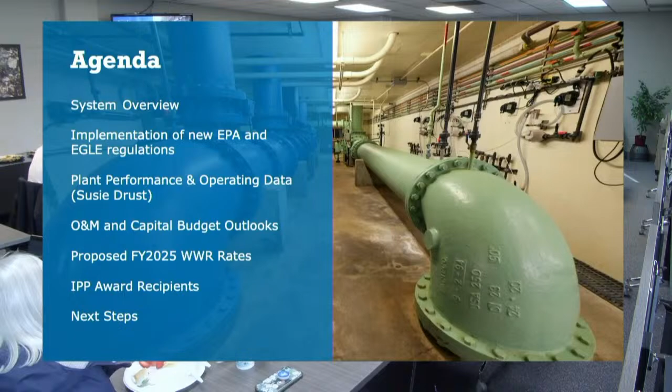So just going into the utility overview, this green polygon on the screen represents the areas that we serve. Many of you here today are your own wholesale entities. You provide service to your own customer base through retail agreements or retail agreements that you have with others. So your area may be a green blob on this map. So all the green blobs on this map all come to this site where we're all sitting here today for treatment.

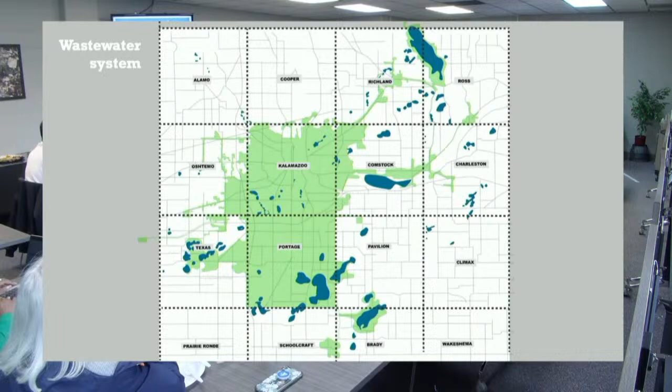This plant is unique. It is the only plant in the state of Michigan that has powdered activated carbon treatment. This plant was specifically designed and built to handle the type of waste streams that it receives, so there's a lot of unique characteristics there. This plant also has an EPA exemption for pharmaceutical waste that provides us the ability to treat that.

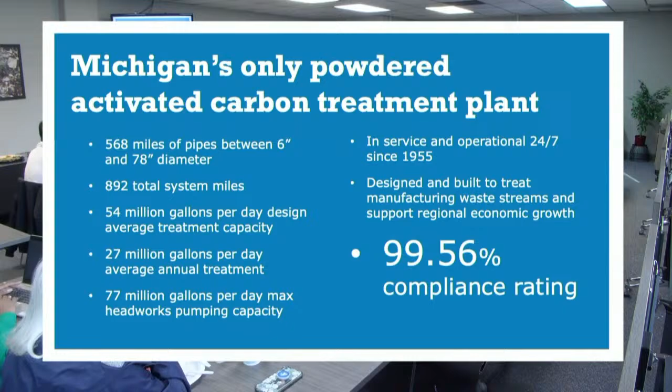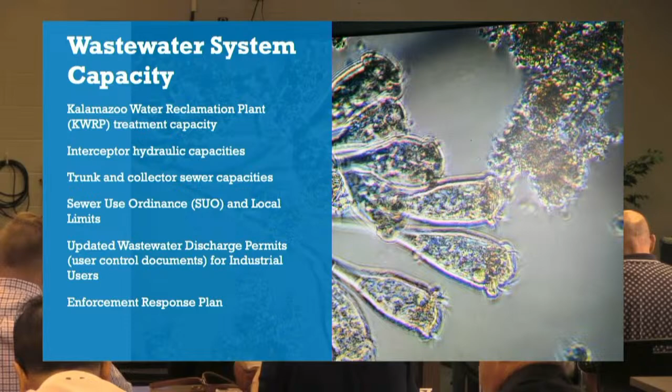In terms of system capacity, we're going to talk quite a lot about this. This has been something that's a bit of a changing landscape for us. We're actually going through an evolution now, through changes with our permit and changes with EGLE, moving away from our historic hydraulic nameplate capacity, and getting into capacity of individual pollutant parameters. We're getting into treatment capacities of pollutants and specific capacities for things in our sewer use ordinance. So we're going to kind of walk through that so there's some broad understanding by everybody.

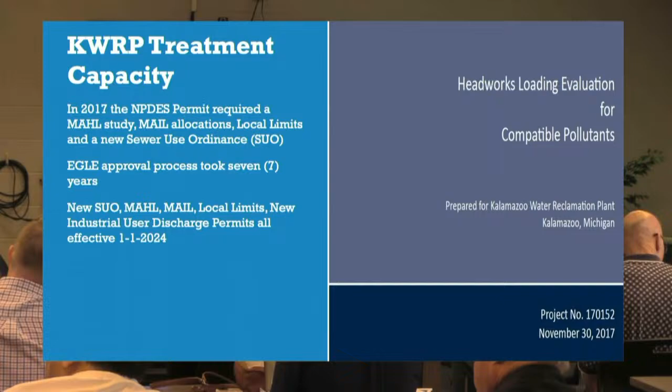Going back in time, back to 2017, we were issued a new permit, and that new permit required several things. It required, first and foremost, that the City of Kalamazoo conduct a MAHL study and incorporate a MAIL. So that was a Maximum Allowable Headworks Loading study that had to be incorporated, and then that MAHL informs the MAIL, which is the Maximum Allowable Industrial Loading.

Getting into some background on that, the way the plant's configured today has had a few modifications to it, but broadly speaking, we're the same plant that went through a basis of design back in 1979, went through actual engineering design in 1978, and during those original designs, we had loading parameters that we established and based our treatment capabilities on. With the MAHL study, a lot of these things changed, and so we ended up getting down to a MAIL, an enforceable MAIL, of only 168,000 pounds for BOD.

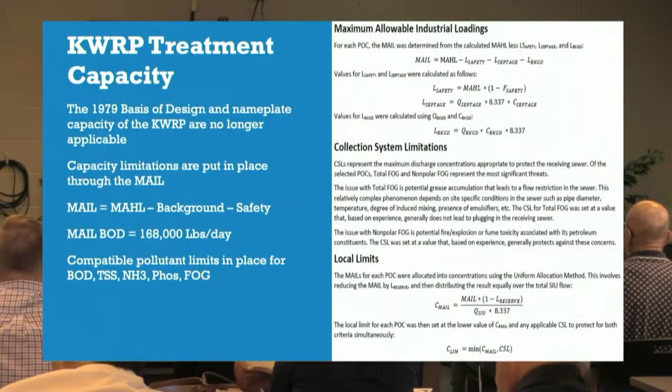Now, all compatible pollutants were updated. Those industries that are here today, you see those in your new permits, and we're going to be talking about some of that. But broadly, there's been a major change from nameplate capacity to where we operate today, looking at capacities in each pollutant parameter. So, one of the things to highlight in terms of where we were, 53.5 million gallons per day, that's our nameplate capacity. We're currently sitting at about 27 million gallons per day of actual flow that comes in our door.

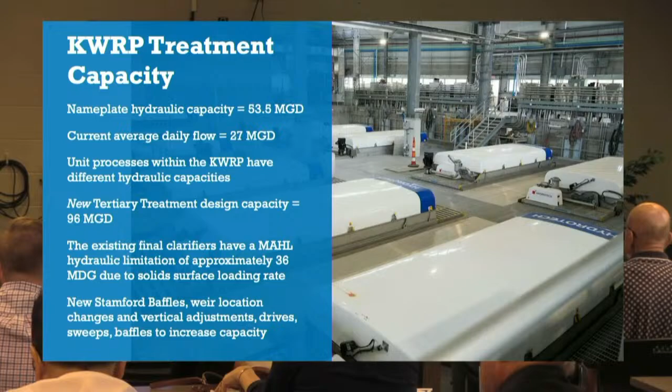We just completed, and you can see the building behind us, a new tertiary treatment system. That's a picture of it there behind us. That system was built to withstand a hydraulic flow rate of 96 million gallons per day. So you can see that we're maintaining and enhancing our hydraulic capacities, and we're having to do that because our organic loadings are much higher. We've got some additional projects we'll talk about in the capital plan that will help to bring up those loadings so that we can restore and reestablish some higher MAHLs into the future.

We also want to touch on wholesale industries and also our townships. So we have IJAs, which are interjurisdictional agreements. Those agreements are essentially in the process of getting rewritten. We've got a requirement from EPA to rewrite those. We also have been working with a group of our township folks represented by the Regional Commission that are helping us to negotiate new long-term agreements. Those agreements are well through the process, and we wanted to highlight that flow and loading is not a limit of those agreements. So those agreements do not limit loading, they do not limit flow. Flow and loading are limited by the physical capacity of pipe in the system and where your discharge point is. However, industries are regulated by that.

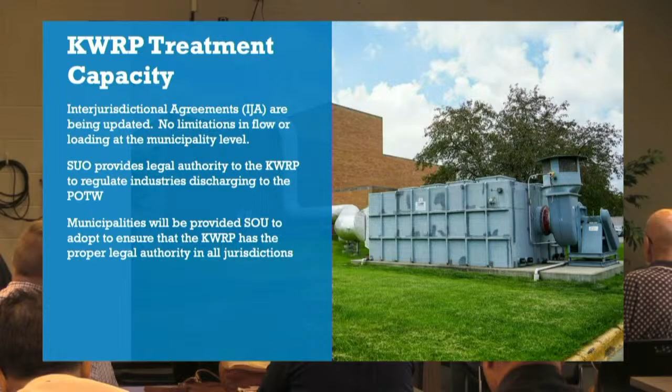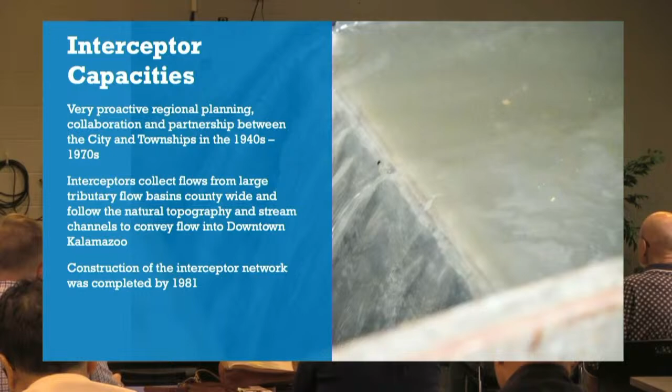Kind of talking through that, we have a vast interceptor network that was built through a lot of great partnerships by many of the communities sitting here today, many of the townships, also supported by Kalamazoo Board of Public Works. That interceptor network was built from the 1940s and completed in 1981. That interceptor network remains extremely strong, viable for future flows. In fact, that interceptor network flow capacity is greater than our pump capacity. So we've got an ability to pump 77 million gallons per day here at this facility, and one of those interceptors can flow more than that. I know, like the river interceptor, at half full or 1/3 full can flow something like 54 MGD.

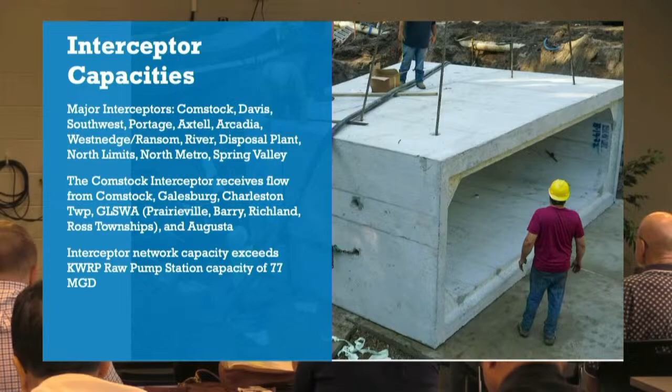So we saved you having to look at it, but we've got a spreadsheet that shows all the interceptor capacities throughout the entire system. But we're nowhere close to exceeding that. So that's good news in terms of capacity and future capacity of both our industrial users and our wholesale providers. Some of the tools that we've got in place to help us monitor that interceptor network is a real-time smart sewer system. So we've got, and we'll be sharing logins and how to access the system.

Your engineers are really going to be excited by this program. We spent a lot of time, about 3 years, developing this, and we've got sensors in manholes all throughout the system. Those sensors monitor flow. So you've got a pipe, the diameter of the pipe, and the grade of the pipe, which means the angle that the pipe is sitting at. And we measure the flow.

We can tell you how much flow is in that pipe, the height of flow, by using Manning's equation. So not 100% accurate, but it's as accurate as most engineers get in terms of monitoring flow in gravity sewers. So it's a great way to check on the system and monitor the system in real time. And so that system is now running in the background, and it will alert our engineers and staff if we have an area where we see a blockage is occurring.

We responded to a blockage of the southwest interceptor along a railroad and low-lying environmental concern area, which is a swamp, something that we don't want to have sewer overflows go into. We were able to go out there and remove a blockage before it became an overflow.

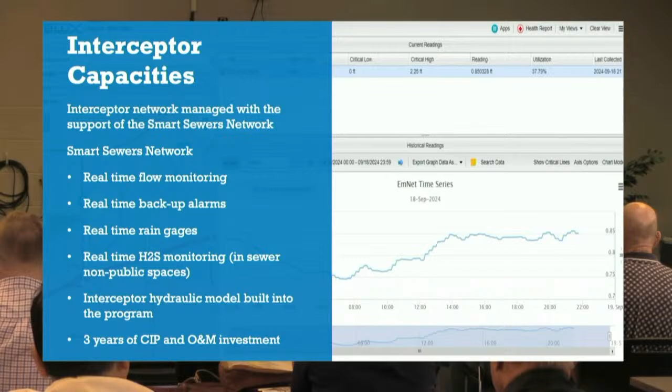That can really help in real time when we're looking at flows that are coming in, high flows at lift stations. It can also help us in future planning as our engineers are looking at spatial distributions of rainfall within our area. If you're into rainfall, if you're into weather, you'll know that Kalamazoo as a county doesn't always receive the same amount of rain over the same area. That rain can be really variable throughout the storm events.

So overall, this system has been extremely beneficial for us. We continue to learn new features of it and employ new features of it, and it's something we're going to be sharing with our engineering partners in the townships as well as we continue to roll that out.

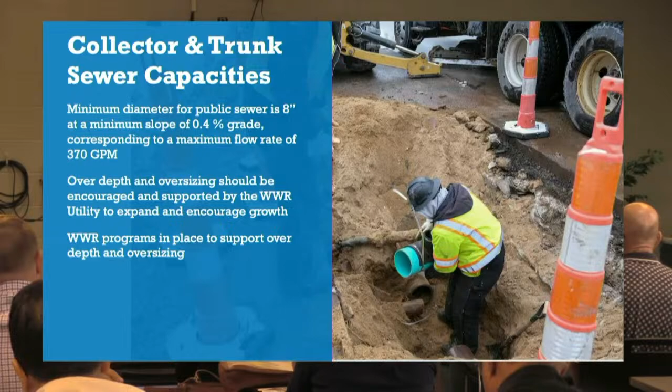Another program that we have, just to kind of touch on it: your regular 8-inch sewer that's down some road somewhere. That sewer's got a finite capacity just based on its size, and we've got a program over on the water side of upsizing. We also have this program for sewer that we're going to be pushing with our partners in the townships. If you're planning an area that is going to experience changes in zoning in the future, maybe that area is going to become a commercial area, we should talk about considering going deeper with your sewer and maybe going larger diameter with your sewer so that you can serve more customers in the future.

So bringing it back to that term regulated capacity, we had a whole host of regulatory enforcement actions that we took in cooperation with EPA and EGLE. That all went into effect on January 1st of 2024. So we've got a new sewer use ordinance, and if you look at our new ordinance compared to our previous one, our previous ordinance was about 30 pages. Our new ordinance is about 180 pages, I think. So it's quite a difference.

That then opened the door to establish new local limits. We've got new dewater and discharge sampling requirements as well. PFAS has been a big issue for everybody. We now regulate and control how much PFAS you can put into the sewer system. We have a PFAS limit here for our headworks loading. We're only allowed to load the headworks with so much PFAS, which means that we can only put so much PFAS in the pipeline.

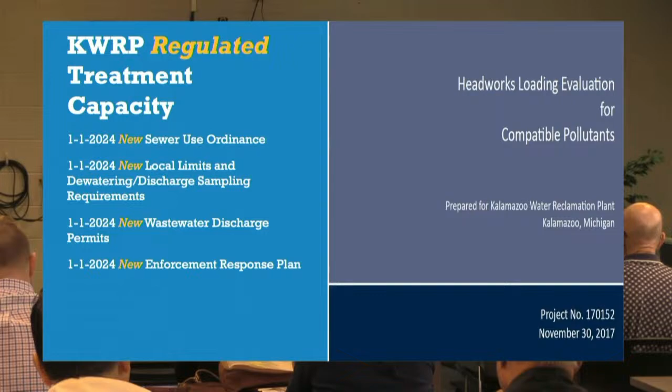We just built a new GPI pipeline between us and GPI. That was a $3 million pipeline. We got the analytical results back for dewatering and discovered that there's PFAS above our headworks loading limit.

We had to bring in a temporary filtration system with GAC treatment to dewater to support that project. That added another $1.4 million to the project. So a $3 million pipeline became a $4.4 million pipeline just because of PFAS regulations.

And I know those kinds of things are going to happen to industries as you guys look to expand, and that's going to happen continually in construction in areas that are building in brownfield areas or building in contaminated areas.

New wastewater discharge permits. So everybody here on the industry side of the house is operating under either a brand new permit or a permit that's going to get superseded by a brand new permit, which will have new requirements. There are whole new requirements for slug discharge control plans, for spill response plans. Some of these things are very different.

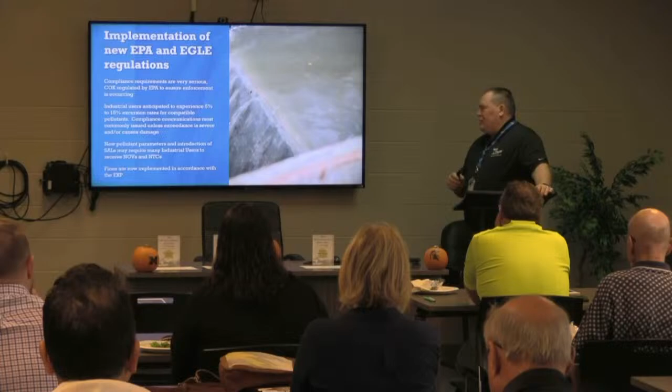Some of you industries have been with us as long as you've been in industry and have been doing it the way we used to do it for 40 or more years, and that's all changing now. So this has been a very steep learning curve for many of us, and we're continuing to get through it together. We also have our new enforcement response plan, which provides guidance on equalized enforcement across all the different industries based on what type of situation it is.

So one of the things we wanted to highlight in terms of compatible pollutants is that most every industry was designed based on our limitation of MAIL. If you remember, our MAIL limitation, maximum allowable industrial loading for headworks, for BOD was 168,000 pounds. So that's not a lot. So that's getting spread pretty thin across all the industries. And that same story goes for solids, ammonia, and what's going to happen in 2025 is phosphorus. And that's already in your permits, and so that's getting regulated right now.

So those limits are spread thin, we know that, and we anticipate that most industries will have somewhere between a 5 and a 15% excursion rate on many of those things. So most excursions, if it's a compatible pollutant and it's non-severe, so no impact, no harm, those are usually handled with what we call compliance communication. If there is an exceedance that's severe or that causes damage or harm, then that compliance communication will be a notice of violation.

We've got all those new pollutant parameters that we talked about. Some of those are requiring SALs. You might have an industry like a metal finisher that now has a limitation for phosphorus. They didn't before. They're now having to have an SAL, which is a special allocation for loading. That now requires us to know your process flow, so we can put concentration and flow together in real time and create a loading number for that. And so that has to be flow proportional sampling.

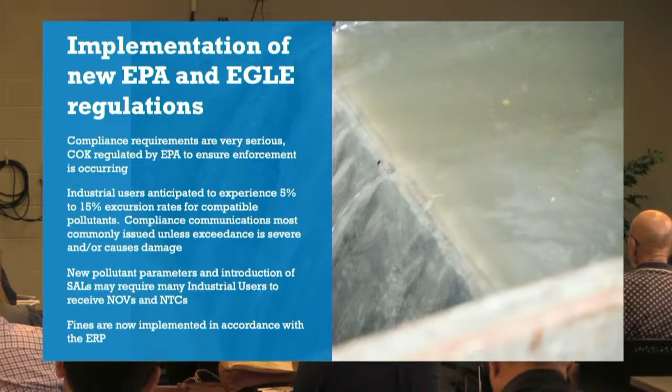Fines are also now part of our ERP. So our minimum fine is $10,000. We usually always try to fine in abeyance. If you get a fine in abeyance, that means that we're going to hold that fine and suspend it while you conduct action in your NTC. So you've got a notice to correct that said we need you to install a meter, or submit some reports, or do some sort of action. And then if you complete that action, that fine is not administered. We also have industries that were unable to meet that requirement, and so that fine did get administered.

Jumping over to some O&M and capital budget outlooks, we want to talk about what are some things that we've been working on at a higher level with some of our other partners. I'm talking a little bit here about our rate negotiations with our regional commission. So there are some fundamentals that we're working towards, and some of those are an equalized rate concept, embracing regional cooperation, looking at this instead of 22 independent systems. We really try to look at it as one broad system with one common goal.

Our common goals are to provide clean, safe treatment, so that we're protecting the environment. Ultimately, that treatment is what we're after. We're also after following EPA regulations on the industries and everything else. And then just that simplified process for providing that service to the public. And if we look at this as a system and we embrace the concept of broad economic growth as a region, we can really look at having a goal of long-term economic stability and growth across the entire Kalamazoo County.

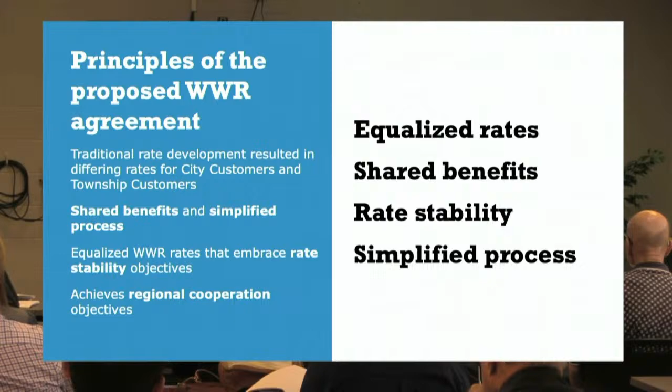So there's a lot of words on the screen here. I'm not going to read them to you. This information is taken right from the rate report.

It really kind of talks about these three main concepts in rates that have been controlling things. One is where we allocate costs for collection systems, and we're providing some updates on that. The other key concept is an equal rate concept of providing the same level of treatment for everybody, and embracing that concept across all user classifications.

So we talked about we have retail users, we've got in-city, out-city folks that participate in retail. We have this group, largely represented by wholesale service providers and retail service providers to others, wholesale to us, retail to others, and industrial users. So these same concepts are being applied across everybody.

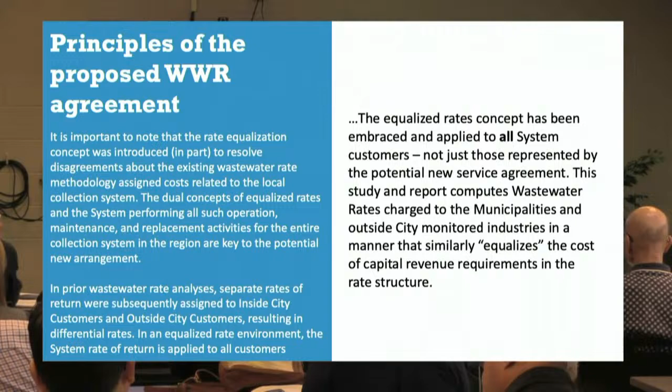And then the other concept within that is the concept of rate of return. If you take the rate of return requirement and spread that out across the entire system, it provides broad system benefits as opposed to a rate of return requirement only on a certain customer class, so that it provides better equity across that system. So those are the rate fundamental changes we're working on that will help the overall system create this concept of equalized rates and a regional approach to the service we provide.

Drilling into some specific areas of level of service, we see chemicals, including odor control, really starting to increase. We're spending upwards of between $5 and $6 million a year on chemicals now. Going back to 2018, that number was closer to about $1.5 million a year. Odor control is a big portion of that.

We've got new carbon scrubber units that are part of all the processes here in wastewater. That was an upgrade we made a few years ago, and we continue to support that with annual investments, the carbon changeouts, changing that carbon out at $600,000 annually to refresh that carbon. So that's one component of that.

Sludge disposal, we're going to talk some more about that as we go through the slides. That has been something that continues to increase year over year. Again, going back to 2018, we were looking at $4.5 million a year on that. That contract stayed with us through 2020, and we've been jumping ever since.

Some other work, really kind of focusing on those sewer collection systems. We take all of our systems and add them all together. We've got about 900 miles of sewer pipe in the ground out there. So that smart sewer system helps us to keep an eye on that.

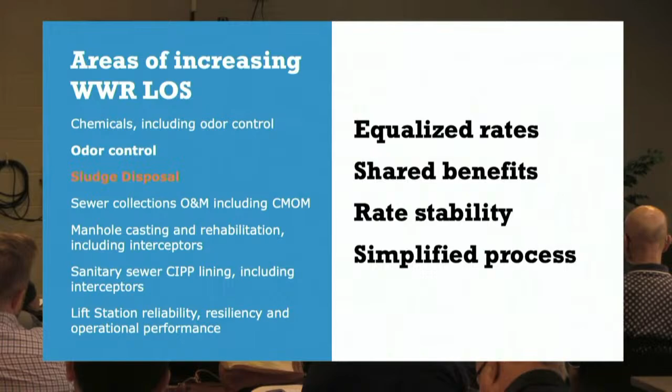We know that folks in your own retail areas are providing an eye on your stuff. And then, with our agreements with the townships, we're going to be doing some sanitary sewer lining and a lot of rehab work on that in years to come.

We've got work orders every day. The TOSs in the room can talk about how many work orders we do and how many are assigned to the different units. And there's a lot of data and information out there that can be overwhelming at times.

One of the other things we realize is that we all drive vehicles to go to work assignments, so nobody walks out to Augusta to check on the lift station. We take a vehicle, and every one of our vehicles are coded by department and GPS to the driver. So we can go to our GPS system and look at where our vehicles are going on a yearly basis.

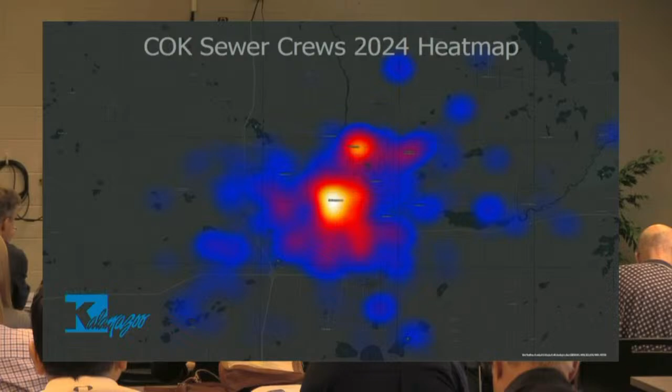So this image is a heat map. This shows you all of our 4-dash vehicles, which are owned by and assigned to the sewer department. This is everything from backhoes to pickup trucks, it's got a 4-dash number on it. And so you can see it's got some heat signatures of where that work's happening.

You see that we've got strong representation in kind of the core city, downtown. We're up in the north side, this is section 10, this is section 15. Down here, section 26. These are kind of known areas for older sewers, clay sewers, and roots. These are heavy tree producing areas.

We're up here in Parchment quite a bit, and then you kind of see dots where we're out touching everybody. You can see we're lighting up areas. Most of those areas where we're lighting up are lift stations or areas like interceptors, areas where we're out doing direct work.

So we actually got one of these infographics for our streets department, our sewer department, and our water department, so we're able to look at, on an annualized basis, where that work is occurring, just a high-level snapshot of what's going on. We do have a home base here at the Harrison facility, and one at the Stockbridge facility. We deleted all those endpoint trips from this overlay so that won't skew the data. These are actual trips, except for Harrison, except for Stockbridge.

Getting back to sludge, we're up to $13.2 million a year last year. That number is even going up. That's an operational number, meaning every year we've got to have $13 million come in just to deal with sludge disposal.

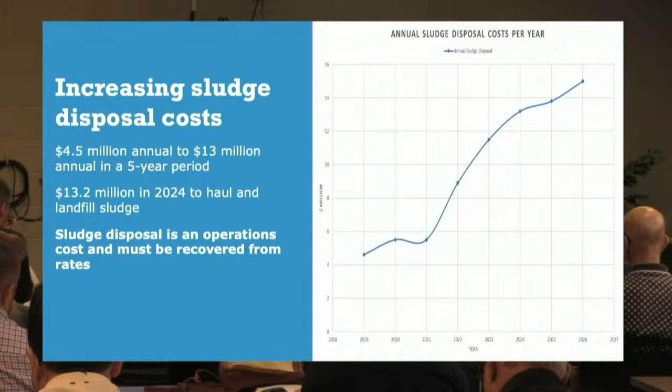We've been working on a process to really get after a new plan for sludge disposal. We've got our sustainable biosolids committee, and we've got a good governance group working on that. That group is going to meet again on November 13th. Essentially we had 30 technologies that submitted to our RFP, so we worked last year to narrow that down.

We got that down to 3 different technologies. We've been doing homework on those technologies to provide better understanding of cost, better understanding of capability, and better understanding of emissions requirements - what we're going to have to add to that equipment to ensure we're at zero discharge for any pollutant parameters into the atmosphere. We're going to meet again and come out of this meeting with some updates.

But where we're really going with this - right now we manage a wet product. We have liquid sludge. That liquid sludge goes through a centrifuge process - Susie's going to talk a little more about that - and then we dry that out. On our best day we're still only drying to 24% solids, meaning there's 76 to 77% water that we're hauling.

We're storing all that wet material on our site. We're consolidating all that wet material on our site, and we're transporting all that wet material through our neighborhood. So we know we've got to transition to managing, transporting, and consolidating a dry material - a dry material that's free from odor, free from any sort of vaporization or anything it can give off. And then ultimately, when we talk about landfill and transportation of dry material compared to wet, it's a huge reduction - we're talking over 95% reduction in weight.

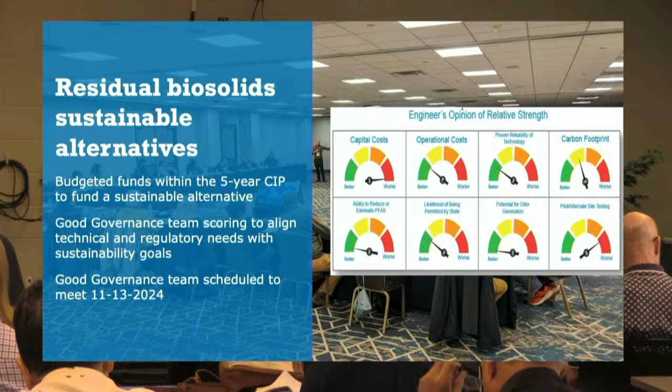Some other capital improvement focus that we have - we're really going to be looking at lift stations. We've got a whole new panel design, and we're taking those panels and putting them out at many different lift stations. I know Charleston's got some new panels. We've got 65 lift stations in the system, so they're all going to be new panels.

We're working towards getting generators at every single lift station. We went through the ice storm in 2023, and we had a real strong realization that we only have 3 licensed electricians on staff.

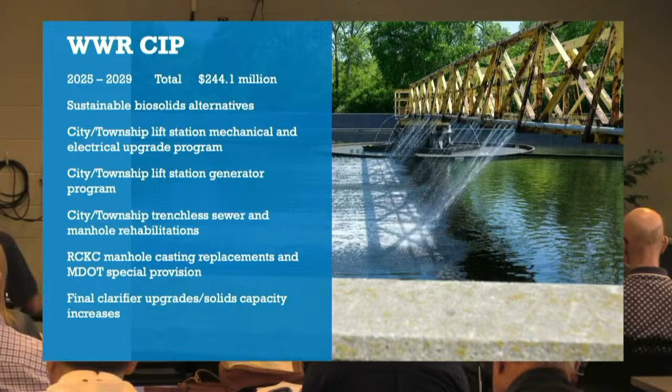And so for us to send a licensed electrician back out to the stations - if I've got a lift station down in Texas and another down in Augusta, there's a lot of driving that has to occur to get that electrician between those stations. So if we can get stations to operate reliably by themselves without a lot of input from our electricians, that's going to provide overall reliability to our system, and our electricians can stay here in the plant and focus on the big picture aspect of keeping SCADA up and running and keeping the treatment plant up and running.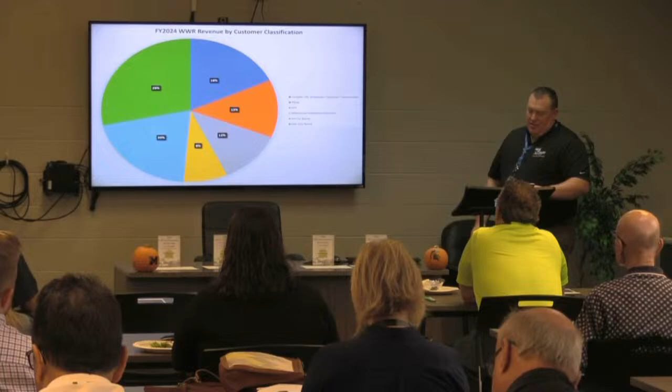So getting into rates here, we wanted to share with you this pie chart. It's broken up into all the different pieces. Broadly speaking, everybody that's in the room today represents about 51% of our revenue requirement.

GPI and Pfizer together represent 25% of our revenue requirement. We add in the wholesale communities like Gull Lake Sewer and Water, Vicksburg, Portage, those folks, and that brings in another 18% of that represented class. Then we've got the remaining industries that bring up about 8%. All told, it's about 51% of the revenue, leaving 49% to all the retail organizations, which would be City of Kalamazoo retail, and then all the townships that represent our retail communities.

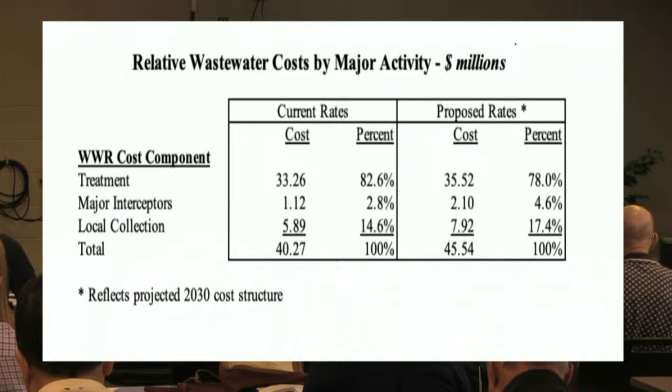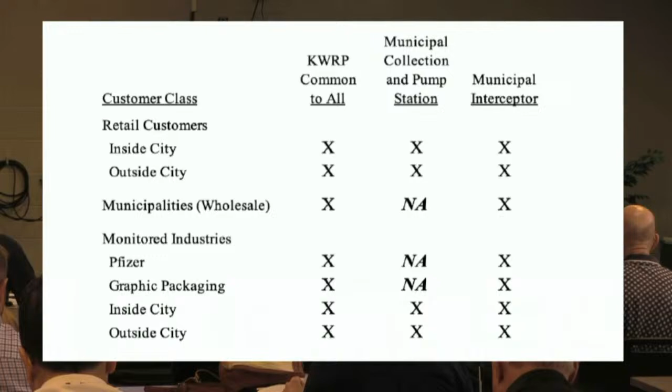We calculate this based on the removal performance of each one, talking from the operations perspective. Within our budget, the operations portion is assigned to treatment. We know the main goals of treatment, and we can go through each unit process and see how it performs based on actual empirical removal data. Those removals then tie back to actual costs, so we've got that shown.

We've had major changes in cost allocations over the last, I'll say, 5 years—let me go 6 years. If we go back to when solids disposal was $4 million a year in total, some years $3 million, when we ran filter presses, we really didn't have a lot of cost with solids in the grand scheme of things. Today we're on centrifuges, and sludge disposal costs are pushing $14 million a year—our costs are much higher than that. So those costs are starting to shift from being hydraulically centered toward being more focused on individual parameters.

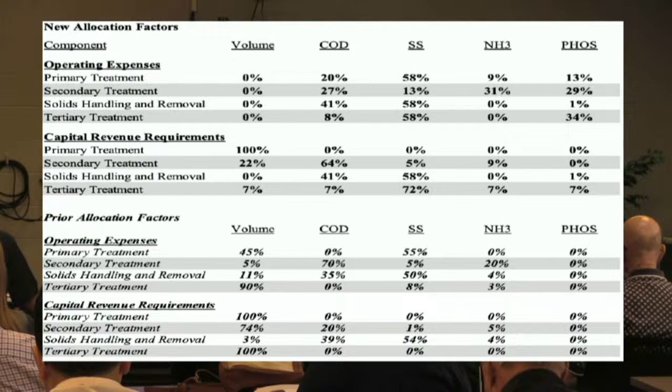Early on we talked about rate methodology changes and how those changes were really goal-driven for an equalized rate concept across all customer classifications. We talked about major changes in level of service and how that's driving costs in chemicals and sludge disposal. We talked about future reduction in operating revenue because we're going to build that sustainable biosolid solution so that we can transition from managing a wet product to managing a dry product.

And when we do that, we're going to realize some dramatic reductions in operational costs. We're going to have capital costs, but those capital costs are spread out over a bonded period, whereas operational costs are unique today right now. So those are changes. We also have overall changes in operational and capital cost allocation factors - just talked about that, that's this sheet right here. And then changes in customer classification, proportional use and distribution - that's what we talked about 2 slides previous, where you can kind of find yourself, municipal provider, what products are offered. Everybody gets treatment, everybody gets collections, or sorry, everybody gets the interceptors.

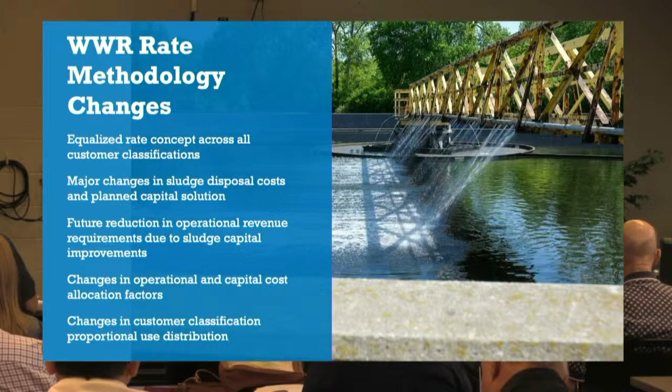So we throw all that on the wall and go to calculate rates for next year. We get some numbers we might not like, and some of that is just due to some of those changes. When we first did this, we calculated a rate increase for City of Portage - I think it was like a 46% increase. And we said, well, Kendra's not going to like that. And not to pick on Portage, but that was pretty much across the board for everybody else - Pfizer, GPI, everybody had similar numbers, and so did City of Kalamazoo. We had numbers that were very high double digit.

So we worked with the rate consultant and said, okay, what's going on here? What can we do? And really it came back to, because of all those factors I just talked about, the instability in costs that are really driving operations, mainly due to sludge and all those other factors I listed - just looking 1 year out doesn't really solve anything. But in time, when that sludge solution is embraced and put into operation, that saves money. So let's go to that year.

So we use what's called a future test case year. We're setting rates in 2030 - so we're going to pretend that it's 2030 and we're going to set rates for that year. Then we're going to back ourselves out of it year by year by year to get to where we are today. And when we do that, we provide what's called a 6-year glide path. We see a major mellowing of those rates. I picked on Kendra earlier, so I'll give her the good news - it's down to, what did I say, 11.9? 10.9%.

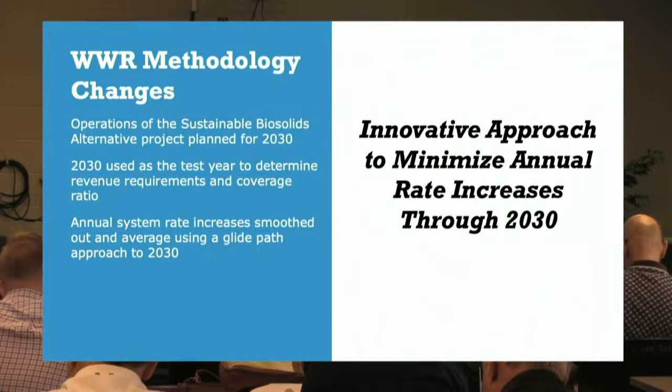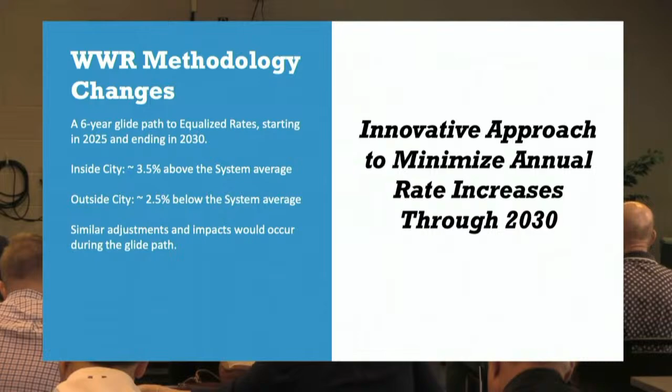Great news with that. Across the top here is that system rate increase. So most of the wholesale users that are in shares, you're impacted by the system rate increase, and then whether your individual flows are going down or up based on your 2-year trend. So if you were looking at a system increase of 12%, and your flows were static, you would have a 12% increase. If you were looking at system flows that were going up, then that would be proportional to that. There is some smoothing between in-city and out-city rate.

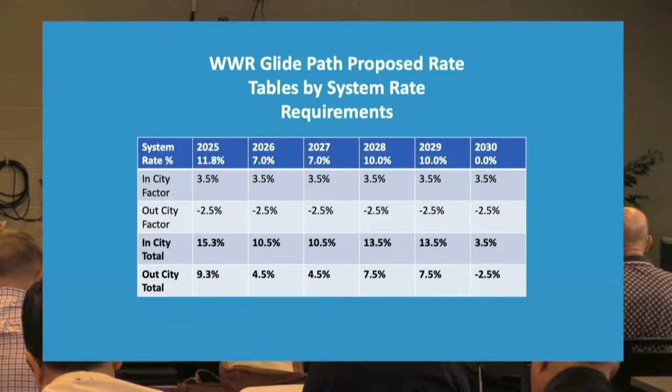You're seeing that. We talked about those retail groups - it's a little bit different cohort than what's here today, but I appreciate that we may have audiences online that may be interested in that as well. Some smoothing of that occurs due to the overall matching of level of service between retail entities and balancing of those collection costs, since we're going to be providing collection services in the township areas as well, and there's capital investment occurring that's getting balanced across all user bases also.

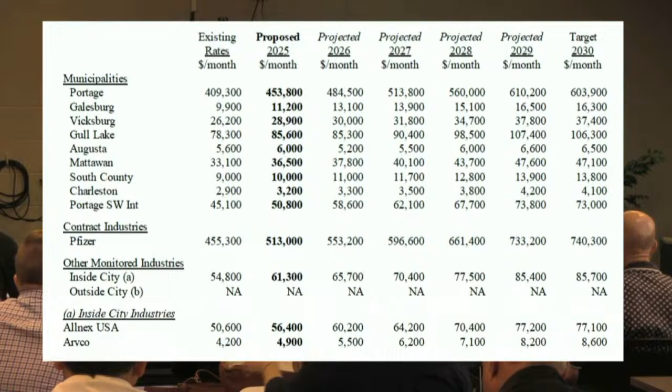So that balances out. You see this is a projection - everybody should be able to find themselves on this list. That proposed monthly rate is here in bold, and it shows you all the way out to 2030. So a different way to look at it, but this shows you what your actual percent is if you're interested. Pfizer, 12.7% - good news, you're right in there, maybe a little bit of a flow increase, but mainly that rate is carried on the system increase, and that's a whole heck of a lot better than talking about a 30% increase. I would have had to give a better launch if we were talking about a 30% rate increase.

Big winner, I think, Augusta, 7.1%. I think we're still working with the flow meter there. Augusta's flow kind of dropped off when we installed a new flow meter. So if that holds true, Augusta's going to kind of go down and stay low. Gull Lake Sewer and Water has been slowly increasing, and every time we put a new flow meter in, it increases.

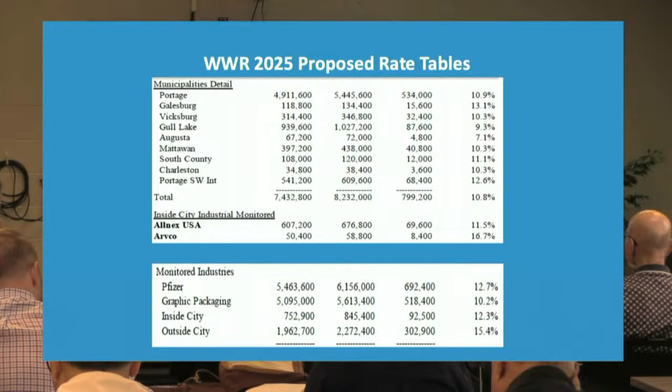So John probably doesn't want us to put any more flow meters out there. Mattawan's been increasing, Vicksburg's been increasing. We're seeing that there are areas in the county that are getting housing increases, and flows are starting to go up. Nothing big, but proportional with growth, and overall, probably good news.

Again, this is good news. It's a good news conversation. I know that looking at 10% rate increases is probably never good news for anybody. But if we really look at the investment that we're planning, we've got a $300 million capital improvement program that we're focusing on over the next 5 years. This really is a good news program.

Just a quick update on shares. I know I'm kind of running out of time here. Municipalities will continue to stay in shares. There's not going to be any open enrollment for shares in 2025. So if you're in shares right now, you're going to stay in shares. If you're not in shares, we'll keep you out of shares.

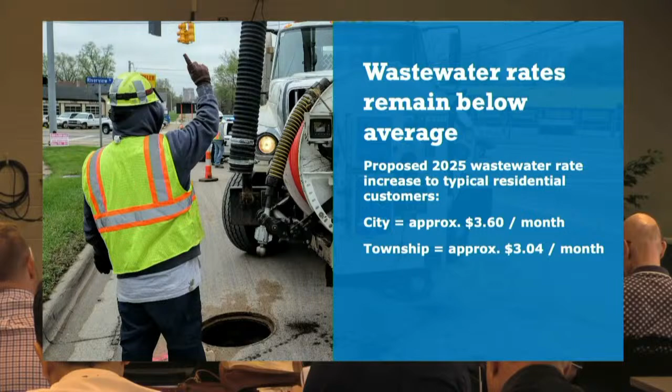For city, actual dollars and cents, what does this all translate to? We showed the monthly numbers for the big wholesale users. It's always helpful to understand what this is for a typical customer. A typical in-city customer sees about a $3.60 a month increase, and for a typical township customer, it's about $3.04 a month.

Where does this put us in respect to other Michigan peer communities? Again, below average. We go from the actual lowest in the state to the lowest in the state still. And then for our out-city groups, we shuffle a little bit with Wyoming. There's been probably a 5-year race between us and Wyoming over the last 5 years on who's got the lowest rate in the state for sewer.

So I know we're talking about a bill we have to pay, and I know no one's happy that it's going up. Broadly speaking, 10 to 12% across the system. But in terms of the investment in the system and the benefit that this all provides, it really is overall pretty positive news.

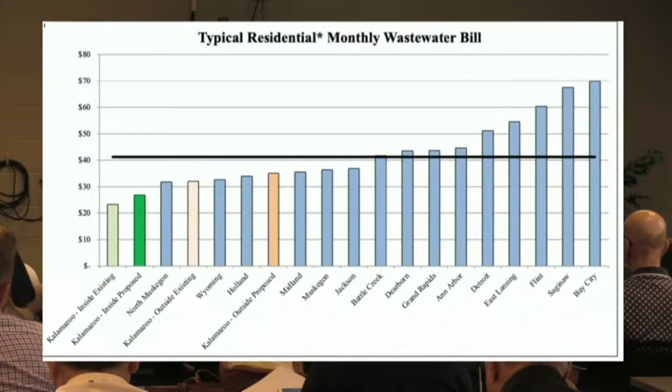Early on, I said we're going to recognize some industries for a lot of great work that everybody's been doing. We want to recognize you in front of your peers. So we wanted to recognize Bell's Brewing for outstanding compliance. So Bell's, if you want to come up here, get your award.

Thank you very much, guys.

Bell's has done just an amazing job, and we just want to talk positively about rolling through all those new changes in permitting. Bell's got quite an operation out there, and there's quite a lot going on any given day. All those new parameters definitely apply to Bell's, so they've been able to make it through it, meet the limits, not get any NOVs, and really kind of keep their heads above water, so to speak, in terms of compliance, and really done an amazing job with the program and everything else. So, thank you very much.

I just want to provide an update on next steps. So we'll be moving this right along. We'll be presenting to the City Commission on the 12th, and then we'll be presenting ordinance recommendations on the 18th and the 2nd. These are all public meetings. Everybody's welcome to attend those. And then for those rate recommendations, we are planning in our recommendations to the City Commission for proposed effective dates of January 1st. And so with that, I'll turn it over to Susie.

I guess I'll pause real quick while we're switching that around. If anybody's got any questions for me in terms of the rates or the work we're doing or solids, I can field them. One question just around the industrial users on the rate percentage slide towards the end there. Yep. 2028, 2029 seems like it went up and then went back down. Is that just where capital is being spent?

Yeah. Some of that too is on some of the flows. We've taken some projections on some of the industrial flows to say, hey, we think you're going to keep growing, but now we're going to kind of balance you out. So again, with the industrial users and with municipalities, your flow is a function whether you go up or down, and then it's your rate. In some industries, we try to understand the industry, but none of us can understand your industry like you guys can.

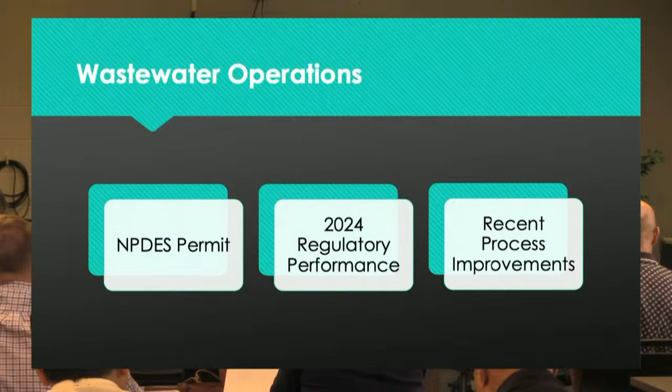The wastewater that we send to the Kalamazoo River must meet a stringent list of requirements and limits, and all of that is detailed in our NPDES permit. Permits were initiated by the Clean Water Act in 1972. The permit program controls the discharges of pollutants into surface waters by imposing effluent limitations to protect water quality. This is a federal program, but in Michigan, our permit is issued and regulated by the Michigan Department of Environment, Great Lakes, and Energy. Our permit provides authorization to discharge treated wastewater to the Kalamazoo River for 5 years.

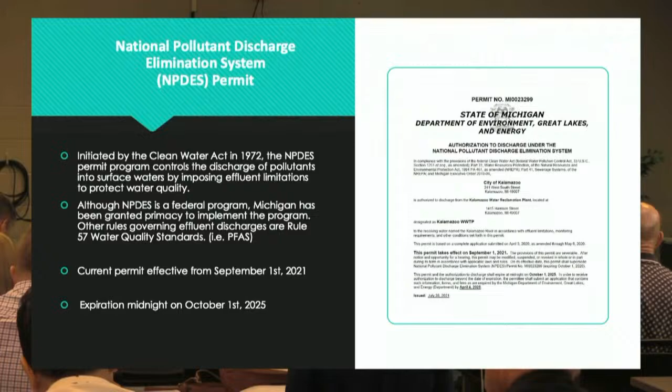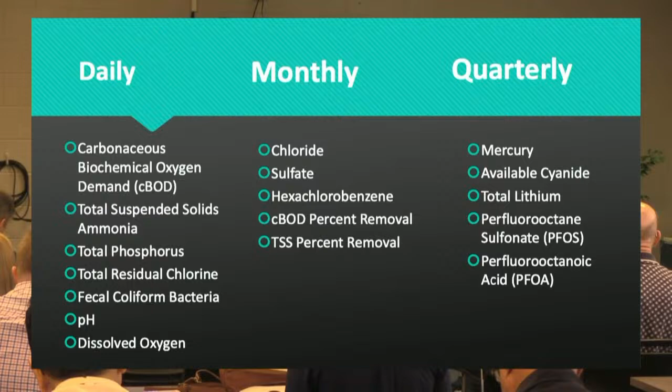We have to renew every 4 years. Our current permit is effective from September 1st, 2021, and it will expire at midnight on October 1st, 2025. So here is a list of the parameters that we're required to test for daily, monthly, and quarterly, as outlined by our permit. All of the sampling and much of the analysis is done in-house by City of Kalamazoo employees. We have an excellent group working upstairs in the Environmental Services Laboratory.

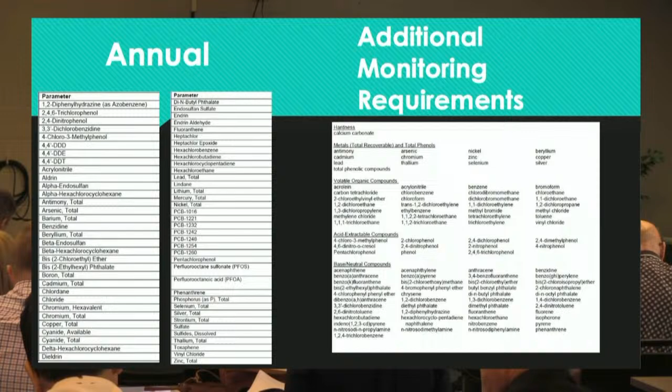Oh wait, there's more. We're also required to test these parameters annually, and then we have these additional monitoring requirements that have to be tested for on 4 separate occasions over the permit cycle. And these dates are predetermined by the state when our permit is issued. Something to mention is that permit limits and requirements can and do change when a new permit is issued. So if there's an annual sampling parameter at which we exceed the maximum acceptable quantification level, that would likely result in an additional permit limitation or an additional sampling requirement in future permits.

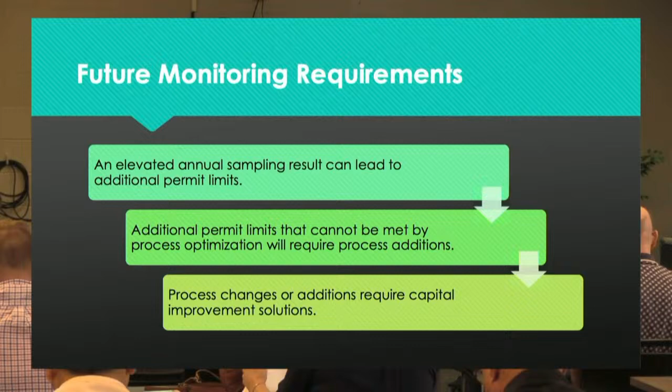And some of those tighter permit limitations can be treated for with our current capacity and technologies, but if those limitations cannot be met by our current technologies or process optimization, the addition of new processes would be required. And of course, process changes or additions require capital improvement solutions.

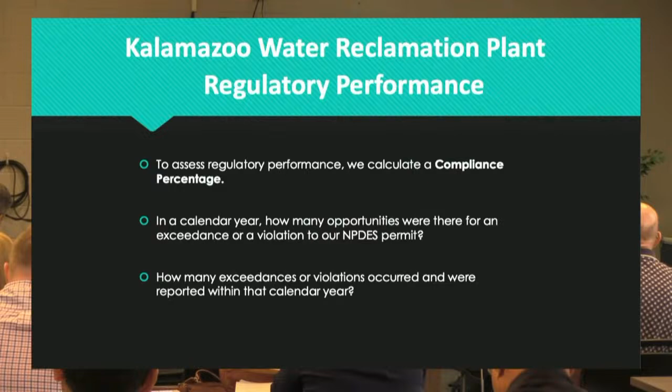So next, I'd like to talk about our regulatory performance at the Kalamazoo Water Reclamation Plant. So to assess regulatory performance, we calculate a compliance percentage. And to do that, we look at, in a calendar year, how many opportunities were there for us to exceed or violate our NPDES permit, and then how many exceedances or violations did we incur within that calendar year.

So we'll look at the regulatory performance of 2024 year to date. So far, we've had 6,018 opportunities to violate or exceed on our permit. And the total compliance exceedances that we've had are 16. That leaves us with a percent compliance of 99.73.

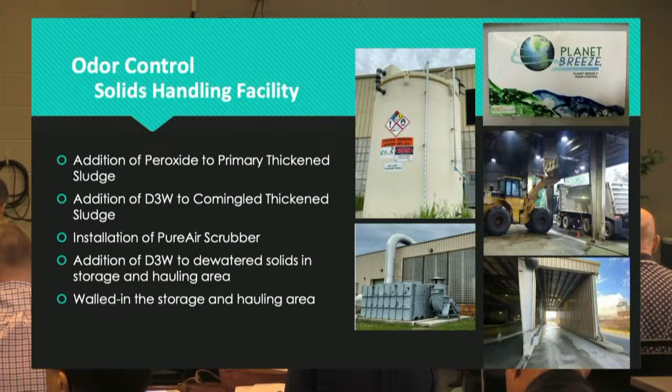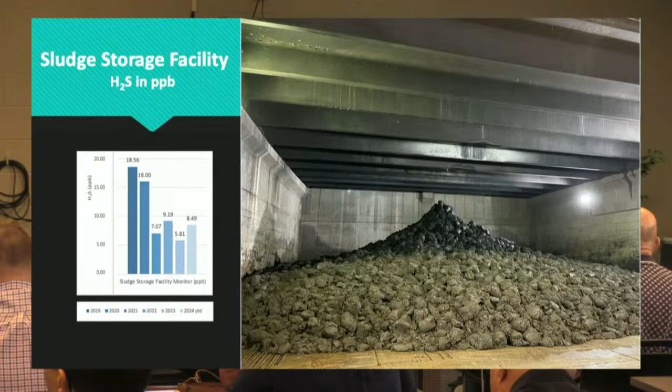In terms of plant-wide odor control, we have these units at 5 target locations throughout the wastewater plant. They're PureAir scrubbers. They were installed in 2021. These pull air from within specific buildings through an engineered media, which is impregnated with carbon and permanganate to trap those odor-causing molecules.

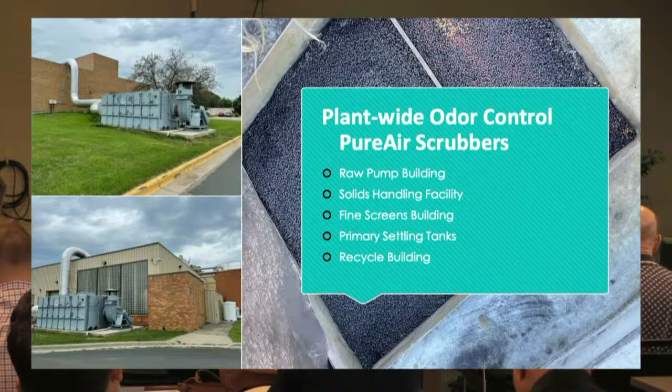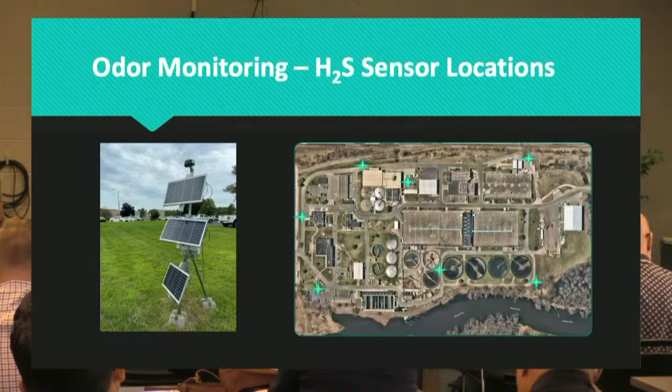So you might be wondering, how do we monitor for and how are we collecting all of our odor data for hydrogen sulfide? So these readings come from 7 solar-powered sensors like this. And we have them situated strategically throughout the treatment plant. We monitor these sensors in real time on the EnviroSuite monitoring system. This system will alert our treatment operations supervisors on shift via email if an odor monitor exceeds a custom set threshold. And that allows us to investigate the source of the odor and take action to resolve the problem.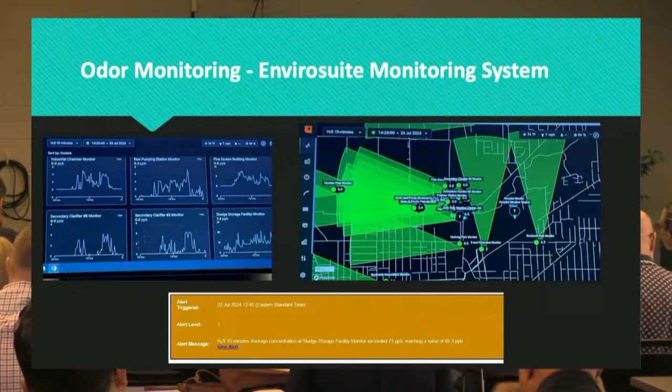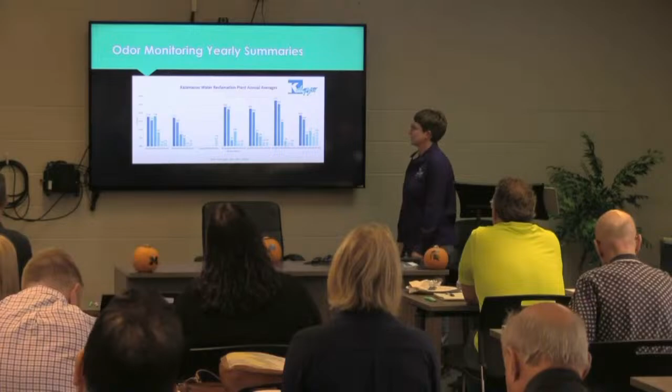So here are the yearly summaries for all of those in-plant odor monitoring locations that we looked at on the map. And again, 2019 is the dark blue line on the left, and through 2024 year-to-date data here. This graph shows the average of all those locations in one graph. So you can see that plant-wide, in 2019, we were reporting about 21.2 parts per billion hydrogen sulfide, and we've reduced that down over the years to about 3.4 parts per billion hydrogen sulfide.

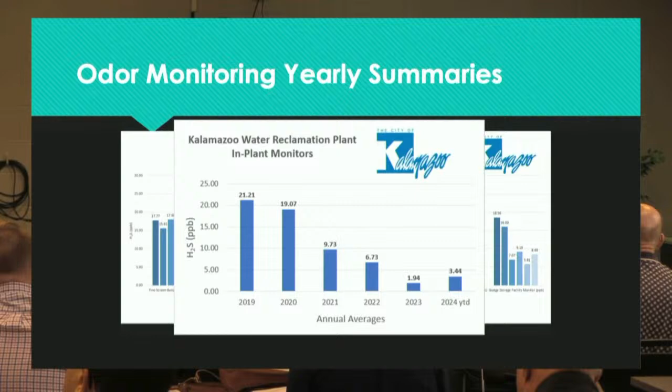These filters are labor-intensive, maintenance-intensive. They aren't really rated for removing large strands of algae or small microplastics. So we actually have these metal screens fabricated for each sand cell. Those needed to be manually pulled, scraped, cleaned, and returned to service by an operator before we could turn a sand cell online.

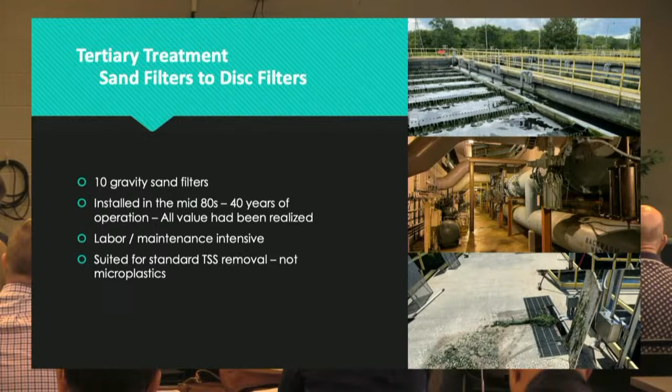So in April of this year, our new disc filter building came online in enhanced manual mode. We don't have the ability to control or monitor everything remotely, but it's still a work in progress. But we're already seeing the treatment...